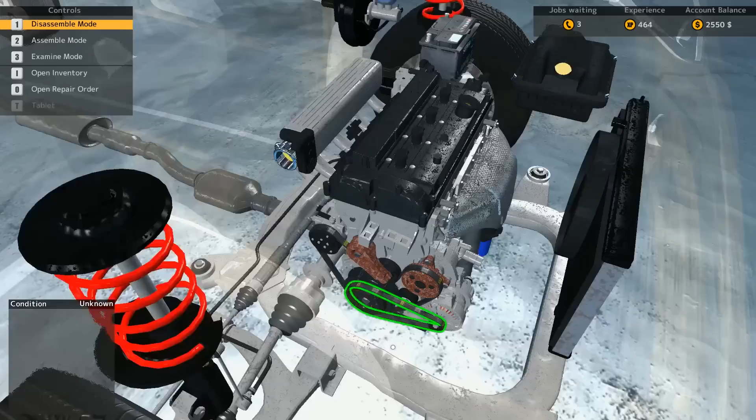And a timing belt. Now a timing belt can be a complicated thing depending on the different make and model of your car. I used to have an old truck, and on that truck, the timing belt was actually on the outside of the engine, so it was a lot easier to disassemble and replace.

What's going on, Buzz? I'm all about making that money. You gotta hold on, leave a message.

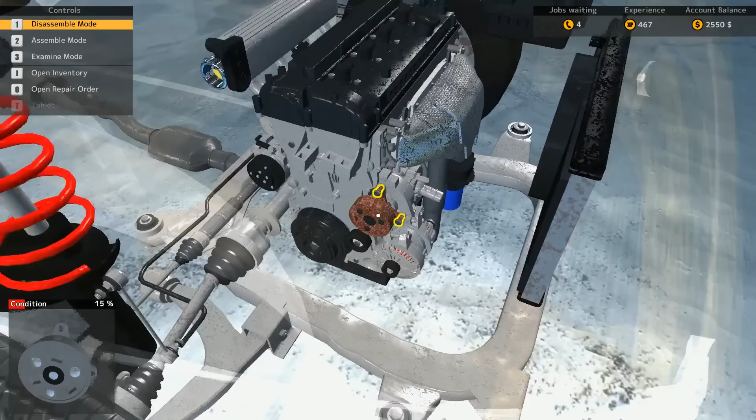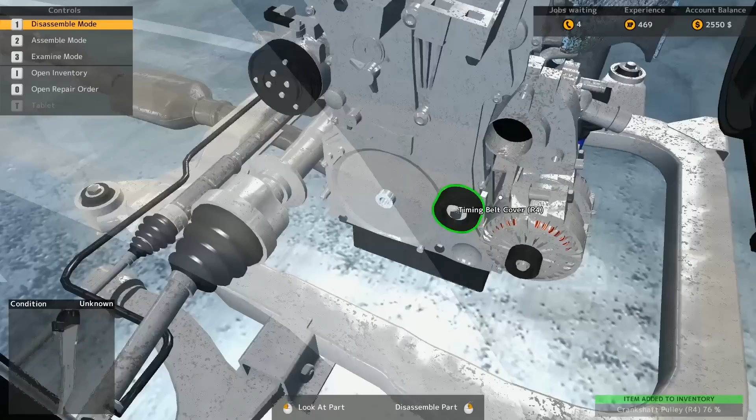But for this particular car, most cars nowadays, the timing belt is on the inside of the engine, so you gotta take apart the timing belt cover. But first you gotta take off a bunch of different pulleys, crankshaft pulleys, and this is just an idler roller. Now we can take apart the timing belt cover here. Gotta unscrew it, unscrew it, unscrew it there, and there you go.

On most new cars, the belts are on the side, but there are a lot of cars made in the 90s, early 2000s, where the belts are on the front, so they're a lot easier to get to. This is like when you see this - this is a very clean-looking car. But look into an engine in America, especially an American car, this is all compacted in, so knowing exactly where you got to go is a little complicated and annoying.

So head over to the computer. We need a timing belt. Timing belt, $120, yep, they are expensive. We need a water pump. Water pump, R4, boom, get it. And a belt tensioner, so let's just put in belt tensioner. 35, fantastic, let's do it.

And we'll put this bad boy together and call this an episode, mate. Woo! Assemble.

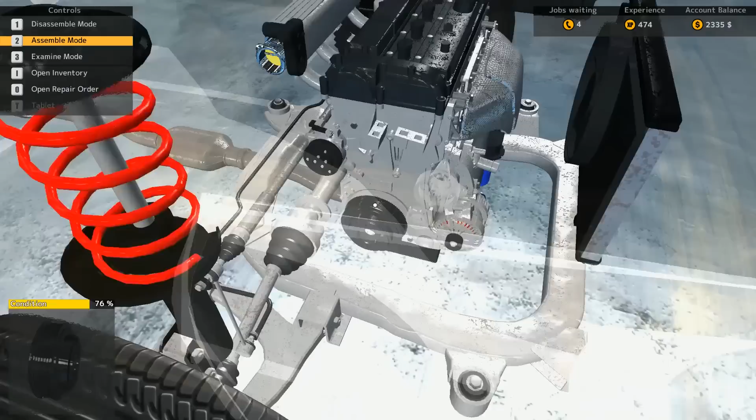If you hear anything in the background, my neighbor decided that he had off today, so it's the first nice sunny day, let's crank the music so the entire neighborhood can hear it. I live in a pretty decent neighborhood, but kids these days, you know what I'm saying? And it's loud. You ever like - I'm not a big hip hop fan, but I do enjoy me some dance music, some hip hop, hippity hop, you know what I'm saying. But I don't like hearing your music inside my house, with all the windows closed, by the way. I just want to add that too. All the windows are closed.

Belt tensioner, fantastic, and then we just add the serpentine belt. And that's it, work order done. $430, $29 later, fair, we'll round up. I'm sure there's a couple cents in there.

Things like that. Now, so far, I have not had a car that I needed to go ahead and take to the test track. Let's see if there's a test track joint. Repair all running gear faults. General engine control and repair list provided.

Let's do it, let's take it. Let's see if I can fit it in. Maybe this will be a quick fix, or it'll be a terribly convoluted and horrible fix that'll take forever to do. Let's see what we got here.

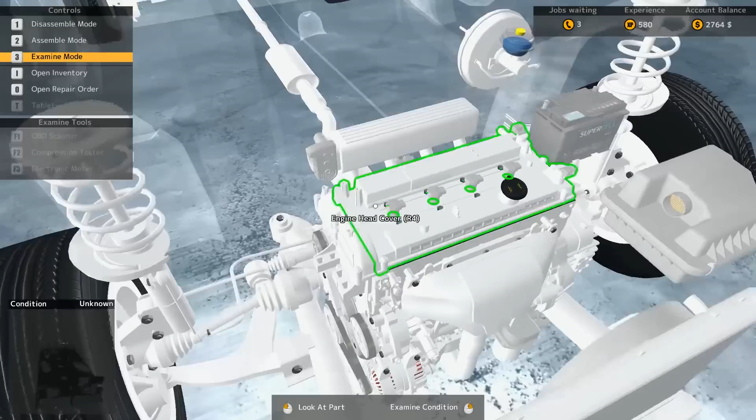What's the problem? Examine mode. Oh yeah, it's all on the inside. What do we got here? Crankshaft, bearing cap, fuel pump, piston with conrod. Really?

So it's all on the inside. Let's see the back, is there anything? Okay, so that needs a fuel pump. That is going to take - and it can be examined by an electronic meter. Okay, but can I disassemble it? Accessible from under the car.

All right, let's move it on over. You're moving on up, homeboy.

Let's take a little selfie first. Bang. Nice. Let's lift it up.

So I can get to at least the water pump, or fuel pump. Yeah, there we go. Take that out. Now the rest of the stuff is going to be inside of the engine itself, and it's going to make us go and take this down.

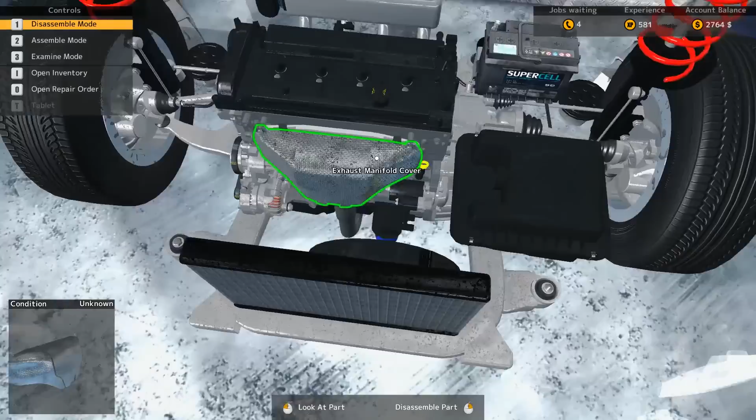Okay. Now, are you ready? Are you ready to take apart our first engine? Boom. Boom. Nice. Off you go.

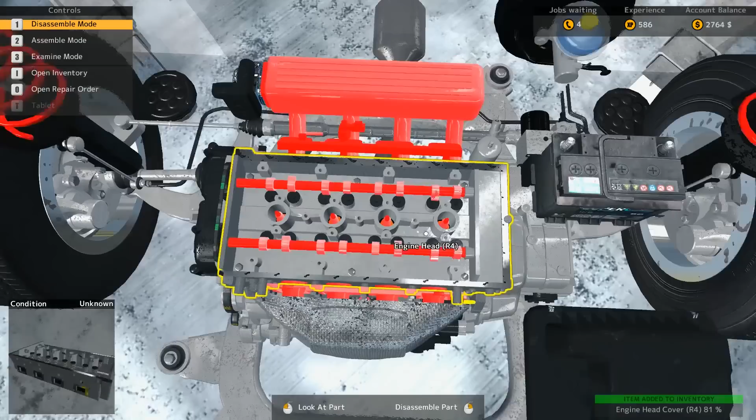Now, can we examine anything from here? Nope, still on the inside. Oh, there's the crankshaft below.

Hold on, I think we can access this from the bottom. Just gotta take off the oil pan here quick. Yeah, good.

Oh wait, hold on, I almost did it. Almost had an incident taking off the oil pan. Like, I'm gonna have an oil spill if we do that. I probably don't even need to do this. But...

Nice. Okay, now we can take this off without having to worry about oil spilling all over the place. Good, good, good. Take that off. There you are. There's the piston with conrod, and it looks like there is something else right there. Crankshaft bearing cap. So let's move on in.

Disassemble this. I was about to take apart the whole engine. No, don't need to do that. Accessible from the engine bay. You son of a bitch.

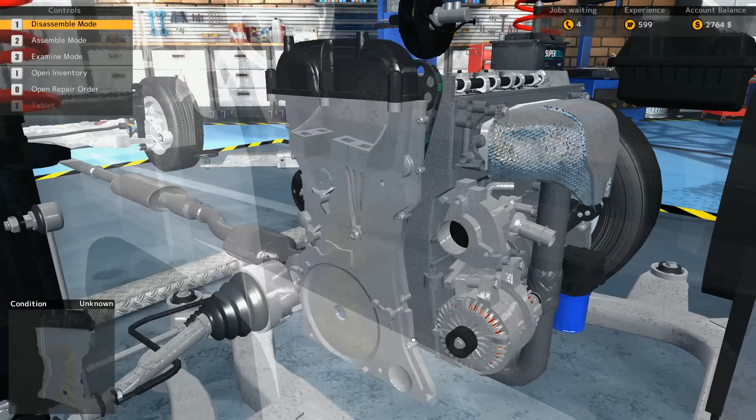Okay, can I get this off? Yes, I can. All this to get one tiny faulty thing. Could have gotten it from the bottom. Nope, can't do that. So we gotta take off the timing belt, the cam gears, get rid of that.

The only reason why I know all these terms is because they pop up. Let's take off the camshaft. Good. Now, how do I get this off?

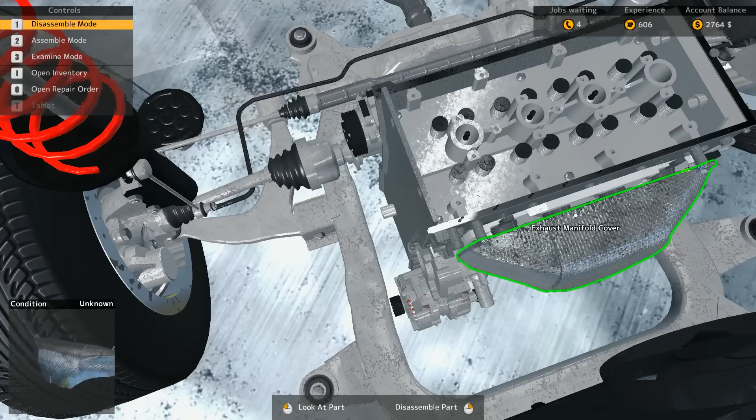Nope, that ain't gonna let me do that. So we gotta take out the fuel. Oh man, you gotta take off the whole manifold, don't you? Really? Do I have to do all of that? Another part, oh, I gotta take off the fuel filter. Yep, gotta take off the exhaust manifold.

Pop that bad boy off. It's gonna be a longer episode.

I want to thank everybody for checking out the first episode. Got a bunch of different views, and I guess you guys kind of liked it. You're like, oh, I'm kind of interested to see what this is all about. Some people might think it's just kind of boring. I'm a gearhead a little bit, nothing too crazy. I mean, my name is Diesel, for crying out loud. You know what I'm saying? You know what I mean?

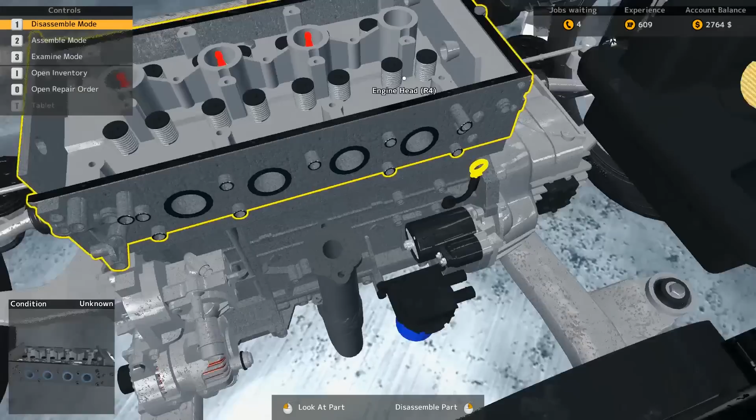Oh yeah, then you take all these out, the spark plugs. I probably didn't even need to take that off. Forgot about the spark plugs. There we go. Then we can take this off here.

Now, who wants to watch me put this whole thing back together again? Me, Diesel. Me. All right.

There you are, piston with conrod. There you go. Okay, so we need crankshaft, bearing cap, fuel pump, piston with conrod. Whoa, whoa, whoa. So we'll take a piston.

$300. Crankshaft bearing cap. And what was that other joint that I needed? Gosh darn it. Fuel pump, yes, fuel pump. $120. We are going to upscale and upcharge the crap out of this poor guy.

We sure are. Alright, assemble mode. Team, assemble. Let's pop that bad boy on here. Now it's all about putting this back together again. Let's see if we can do it without screwing anything up.

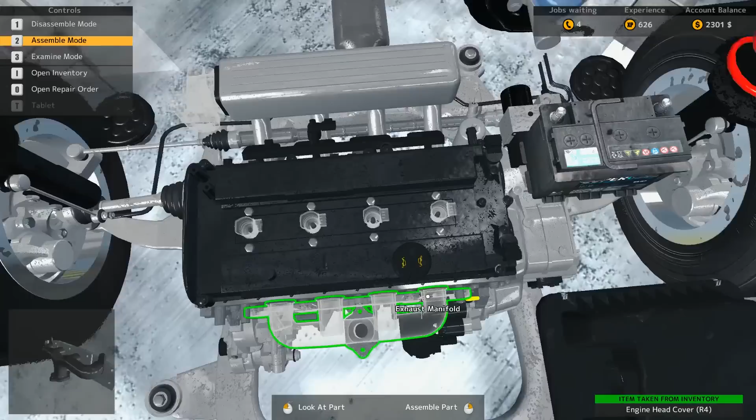Okay, let's put the throttle back on. Easy enough. Let's put the ignition coils on here. Ignition coil, ignition coil. Gotta put the exhaust manifold back on here.

Screw these bad boys in. I swear I need one of those drills. Rock and roll it. Can you imagine having a socket wrench for the entire thing? Kind of a poor ass mechanic dude.

What do I look like? Let's put that bad boy on. We'll screw this on here.

Good, good, good. Now we gotta put on all the timing belts and things like that. Geez, man, this is like a very detailed oriented game.

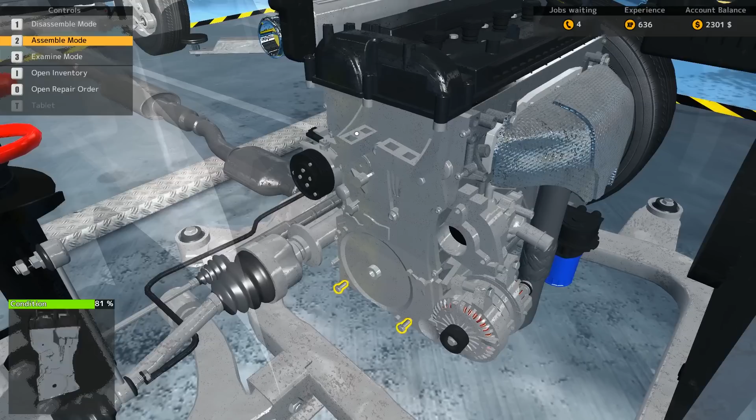It's not 100% real to life because obviously you just can't pop these things off that simple, and the engine compartment is usually compacted to the brim. For some engine parts that are inside the engine, they usually just take the whole engine out and work on it outside of the car. That way you don't mess up anything inside the car, accidentally ruin anything while you're trying to get to whatever parts you are trying to work on.

Okay, belt time. Tension cover, good. Okay. Anything else? Oh yeah, but we have to go underneath the car for it. So, whoa.

Okie dokie, pokey schmokey. Now let's get in here. Assemble mode. Need to put on... where are you at? Where you at, homie? There you are. Crankshaft bearing cap.

Screw that bad boy in. Then we'll put on the oil pan. And since we had to drain the oil so it didn't spill all over the place, we have to fill it back up with oil.

Okay, so that's on. And last but not least, assemble mode. Fantastic. Okay, now let's lower this bad boy down. We'll put some oil in here.